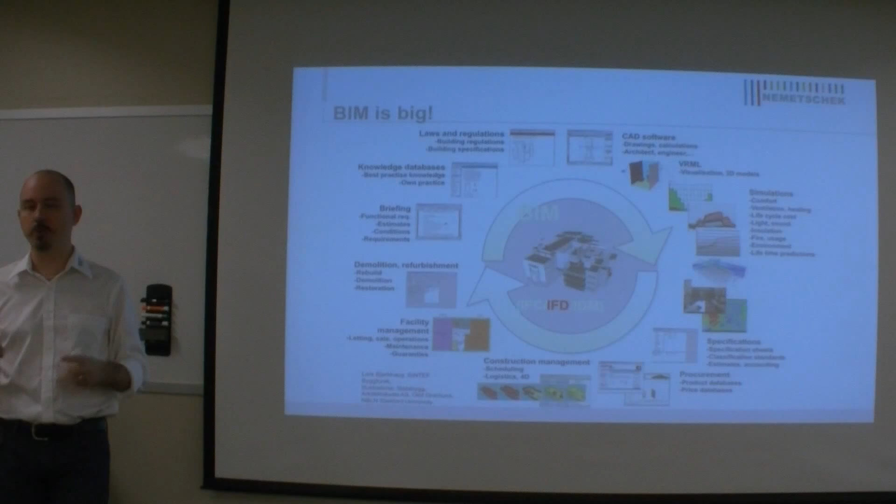So, what does BIM look like from the Nemetschek perspective? I think because of the type of setup, the type of company that Nemetschek AG is, and that all of us operate independently, there's an understanding that BIM is a very large and complex process served by technology. There are so many things that can possibly go on in the BIM process, so many points where high-value processes can occur by many different types of people, that it's impossible really for one person, one company, one technology to do it all. It's too large.

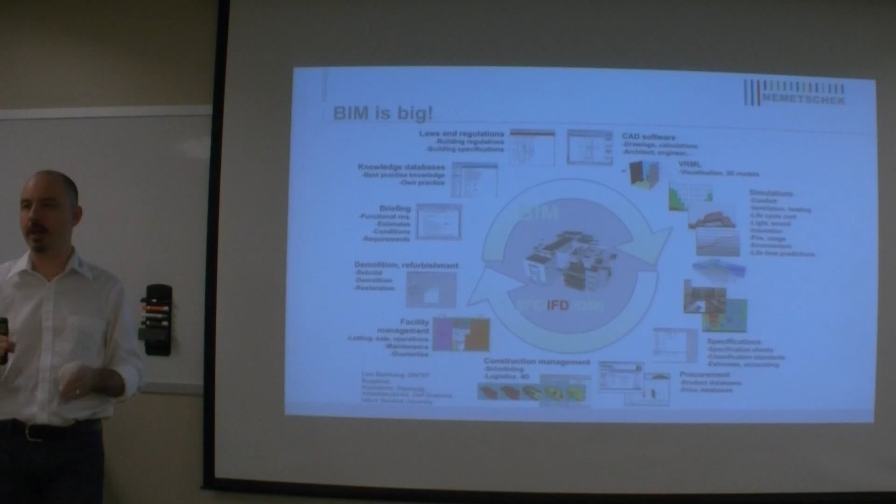So instead, there's an idea of focusing on this idea of trying to create the best-in-class solutions where they can, and then finding the opportunities to collaborate with the rest of the BIM community.

So if we look at the BIM software market, right, we're talking about an industry that's over, I think the latest numbers are 7.4 trillion in the global construction industry, and 5% of that is spent on software. Okay? But within that market, you look at it, as big as Autodesk is, there's still only 1/3 of all the software that is sold globally to get this work done. Okay? So when you look at the diversity involved, how do you move forward?

Right? How do we get BIM to work for everybody without everybody being required to buy the same software or work on the same platform? Everybody has all of these technologies, some very good technologies that do very good things. Some of the technologies work for very specialized reasons and specialized processes, right? And it's very difficult for those things to kind of be a jack of all trades, and end up being a master of none, right?

So wouldn't it be better instead to have these type of communication, these type of collaboration where everybody can work together and still have their best-in-class tools? And we're used to digital interoperability, right? I mean, think of all the different pieces of mobile hardware we have available to us today, whether it's iPhones or Windows phones, which few are still left, Blackberries, Android phones, tablets, desktops, laptops. I mean, we're all able to communicate.

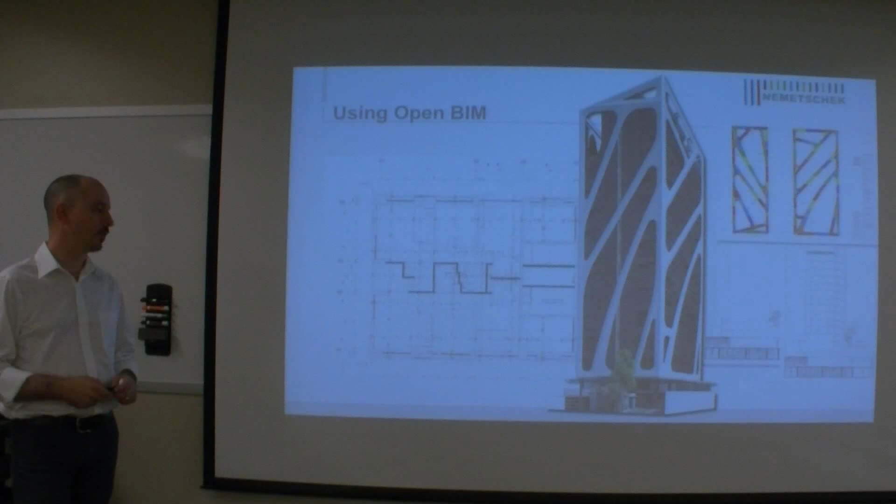So one example is just a project in the Dominican Republic. It's called Ouellette. It's a multi-story residential project, and essentially you start with Vectorworks Architect, doing some general programmatic studies and massing studies, and then moving into using BIM elements.

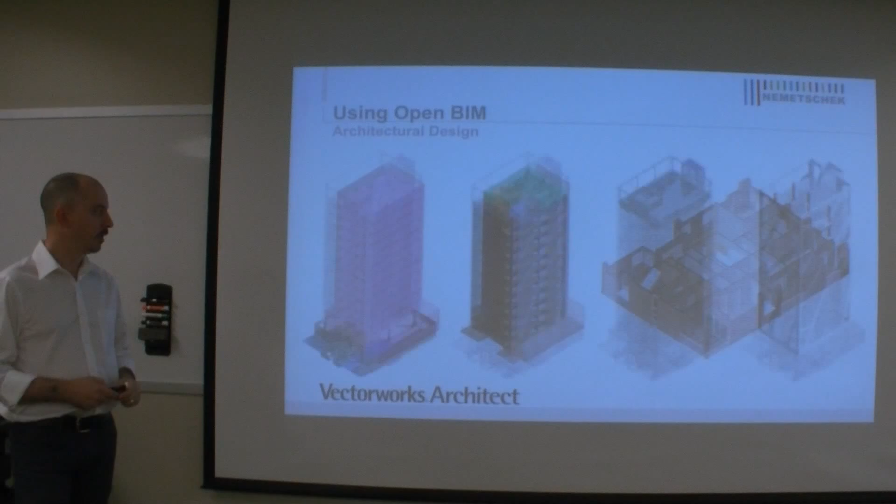And being a large building, it has multiple components. There's the base, which is parking, and then you have some common utilities. Then you have the residential units, penthouse area, and then this exterior skin. And the exterior skin is interesting. It's half decorative, half solar shading skin. So it doesn't do 100% solar shading for all of the units, but it's an interesting design concept.

And so all of this was actually modeled in Vectorworks, and then it was chopped up into pieces, and then it was actually milled pieces, I think the largest ones were 8 feet tall, and sectioned off, and then it was assembled on site. So it's all EIFS, polystyrene kind of stuff with the shiny finish on it. But that's what it looks like.

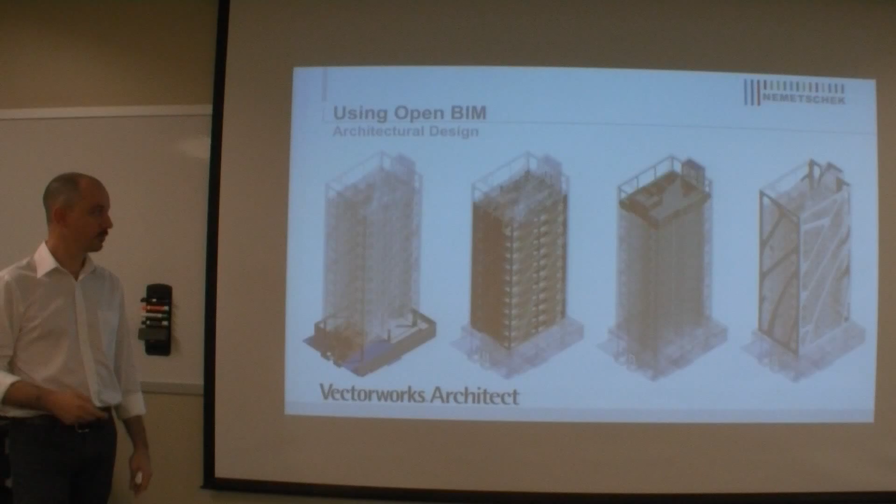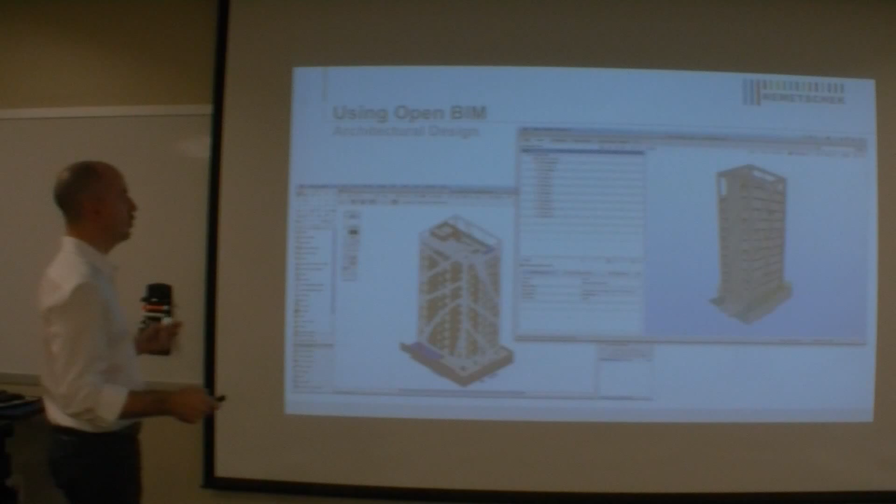So going from a Vectorworks model and exporting it out to IFC, being able to capture essentially all of the geometric information is just one step, but it's a major step, right? I can get out of my native platform and I can push it out so that it can be used by other applications to get their work done. So using IFC as a means to do quality control, quality assurance that the model is correct.

It's very easy when you're sitting there modeling and trying to put this design together to make mistakes, right? The software is smart, but the software is not omnipotent. It doesn't really know everything. It allows you to make mistakes. And the great thing about tools like Solibri or even Navisworks is it'll find the mistakes for you, right? It understands the rules and relationships between objects.

So you're able to send this model out and you can see, hey, these walls were too tall. They intersect with these beams. Or that I don't have certain clearances in front of certain doors in my unit. So I can use this as a quality check even for my use as an architect in Vectorworks, right? And do the same thing.

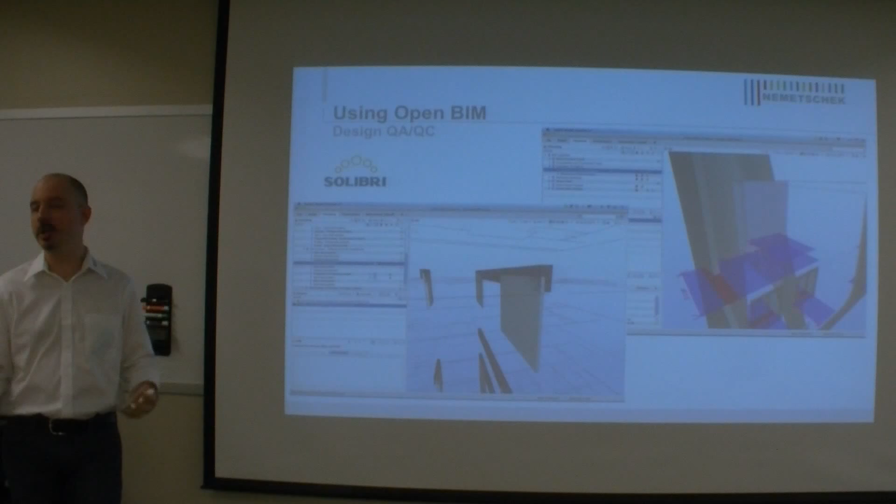Solibri likes to talk about this in terms of using Revit too. How do I know I've got a good model, right? I have to do a quality check. How do I do that quality or sanity check?

So then taking that model once it's finished and pushing it out for building energy performance, as I talked about before, is using IES. IES is an interesting company. They sell software, but they're also a consultancy, right? So they have a number of scientists and environmental engineering experts that not only are responsible for creating the software, but also for training people to use it. And when it's too big or too complex of a project for an engineer or an architect to handle, they'll do the work themselves, right? And they're based in Glasgow, Scotland.

So we do a sanity check and we say, okay, what does IES need? Well, it wants shading devices and spaces. That's it. That's how they do their simulation. Because all of the thermal information from walls, all of the thermal characteristics of a room, the requirements, it's all encapsulated in the space objects. It doesn't need all of the walls, all the junctions, all the doors and windows. What it needs are the spaces and what we call space boundaries, right? The hole that represents where the window or the door is. That's all it cares about, these planes.

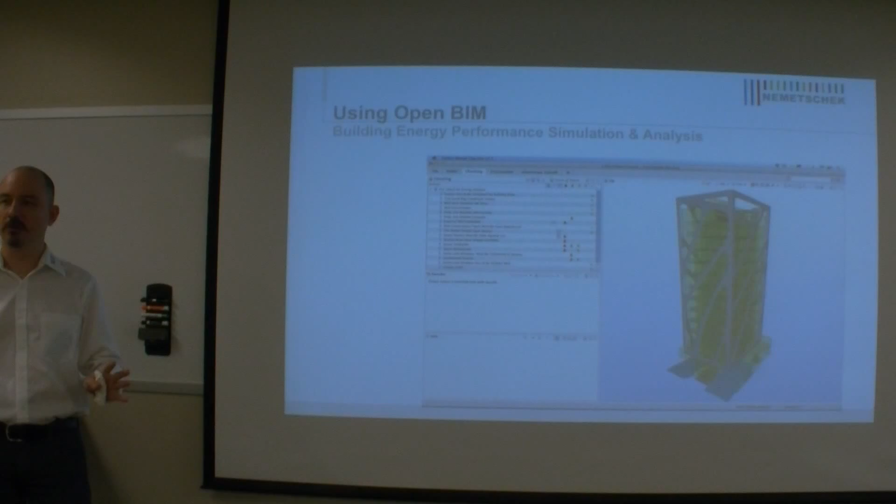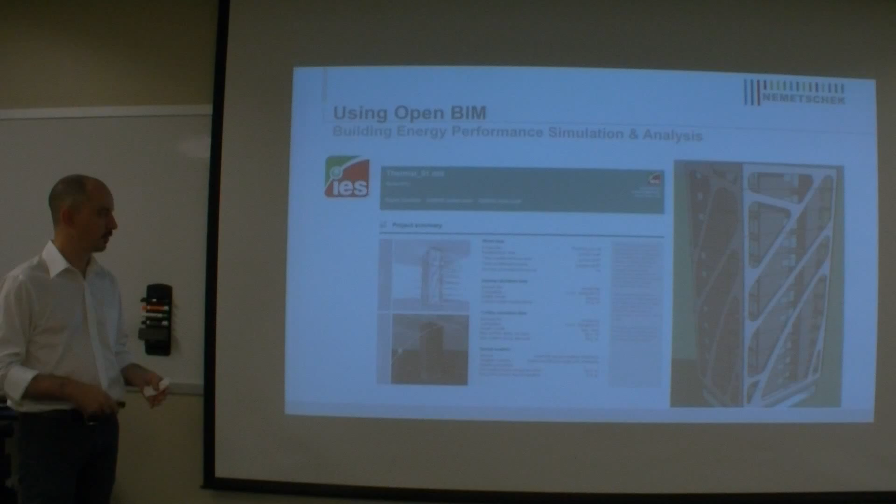You can have solar studies and what's happening on all the surfaces, subdivided in terms of heating throughout the day, different points of time, in different times of the year. And then producing the psychrometric charts: what's happening in terms of the comfort level of the spaces inside the building based on the climatic data for this particular location, right?

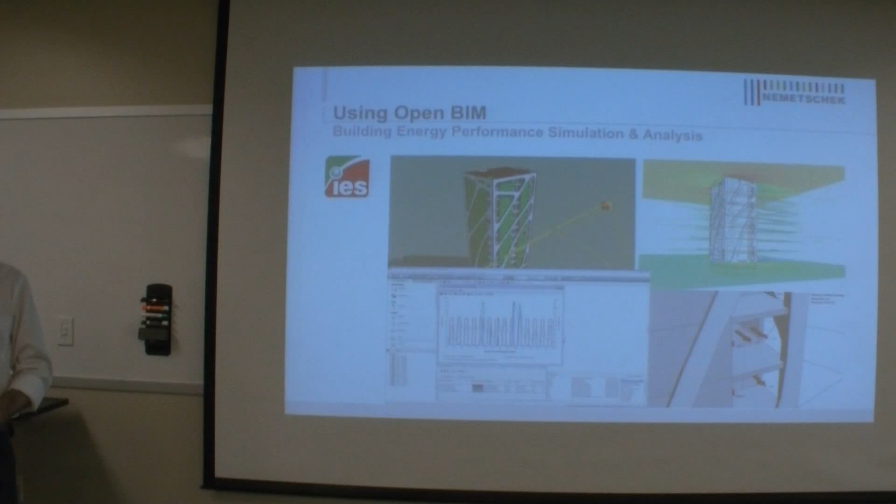And even looking here is a detail of what effect the winds and the orientation of the building have on the balconies. Is there a positive pressure? Is there a negative pressure going on there? Are people going to basically get sucked off their balconies every time they step out there? So it can provide that type of information, and that's great.

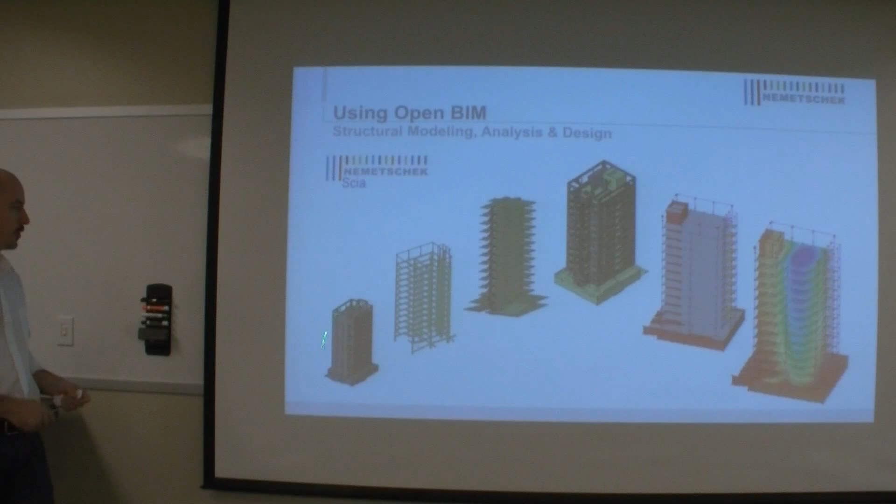Taking that same model and moving it over to Nemetschek SCIA. Nemetschek SCIA is basically sucking in that IFC model and then going through a transformation process where it says, okay, I have this IFC model, I understand here's a beam, I understand here's a slab, but I have to turn that physical model into an analytical model, right? Because the analytical elements are different than the physical elements.

When I have a slab, it has an analytical plane. What is my plane? What is my diaphragm? And then for a beam, is it the center line of the beam? Is it the edge of the beam? Well, the structural engineer knows that, not the architect. And the structural engineering software is intelligent enough to help the structural engineer make those determinations and clean up all those intersections.

Because as an architect, we think a lot about the physical details of the way a building goes together. But what the structural engineer needs to do in the analysis and design is figure out, well, where are the forces meeting? Where are they actually coming together? And how does that actually work?

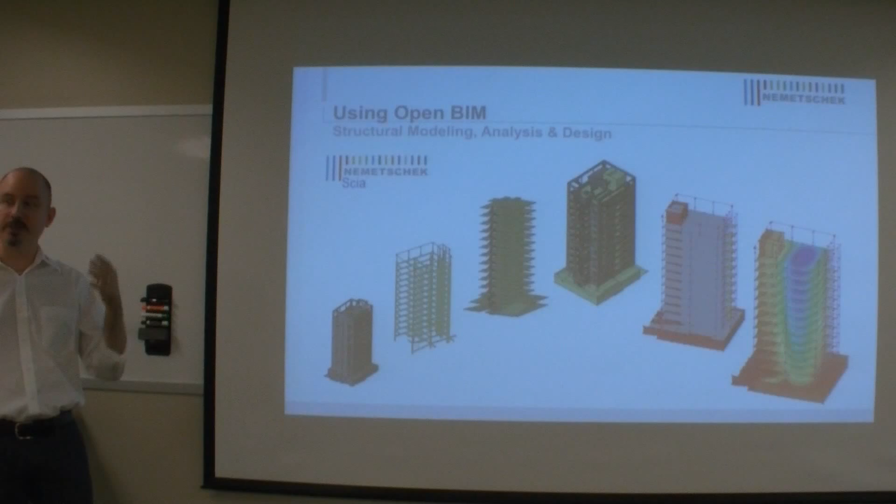And then from SCIA, you can even take it over to Tekla, where it says, okay, well, I know in principle how all those things are happening, but then when it comes time to detailing it, how do I do that? And an application like Tekla is very useful because then you can actually take those pieces and put them together all the way down to the bolts and the rivets and the welds.

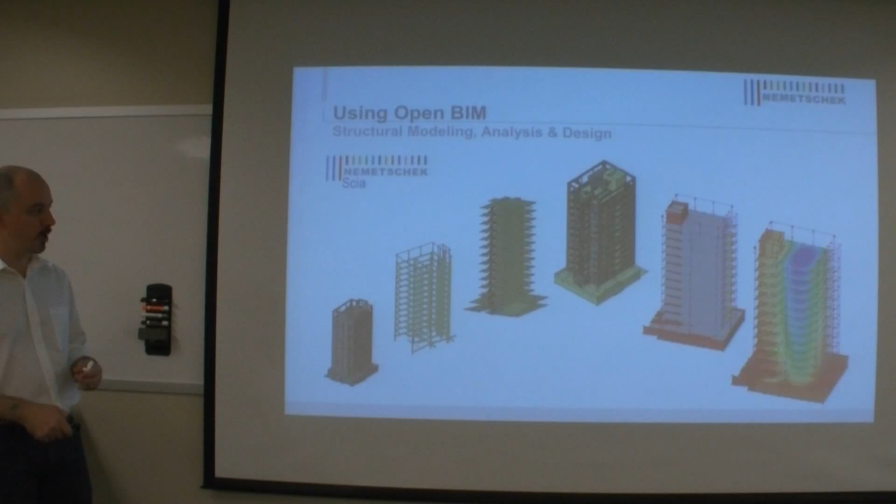So here you see the basic frame, concrete frame, you see the plate elements, how everything goes together, and they start doing structural analyses on the analysis model, right? The abstract model, where you see where the stresses are on the plates and in the walls, these nodes. Then you take that information and you actually are able to overlay it simultaneously with the physical structures.

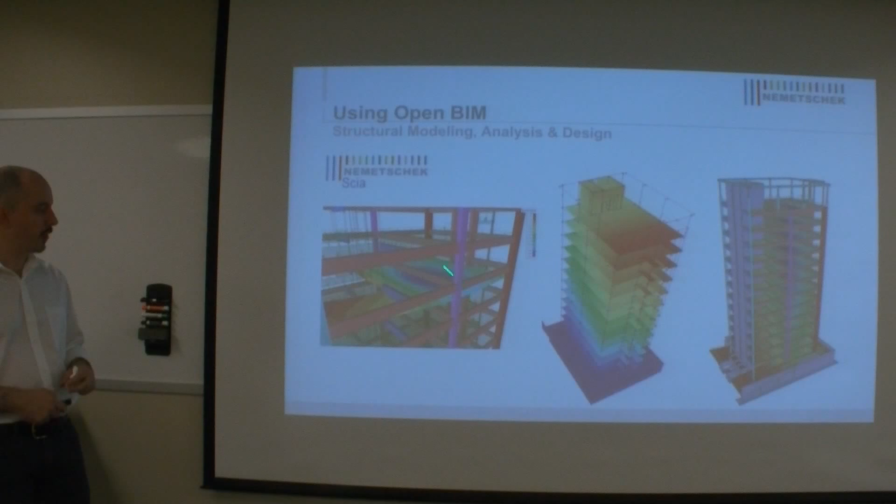So you can then begin to see what happens to the deflection of the slab within the skeletal frame, right? What's happening with the pressures on that? And where is more structural reinforcement going to be needed? Or is a thicker slab needed? Or is more structural framing going to be needed?

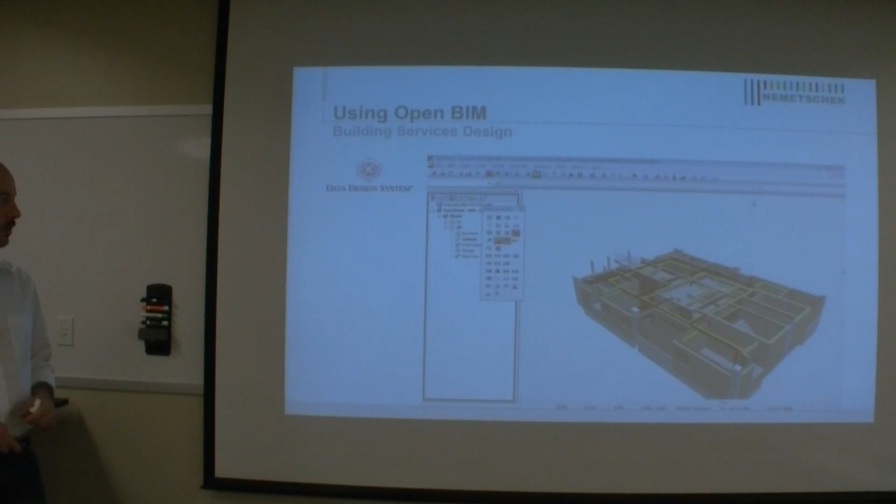At the same time, mechanical electrical engineers can be working. And in this case, we were working with engineers from DDS-CAD. And they were able to take that same IFC model, that same base model that we gave to the IES guys, that we gave to the SCIA guys, and they were able to suck it in and start laying out the HVAC and plumbing work for each of the stories, for each of the units. Right? And this is just a snapshot of their tool. And then they're able to export that out as IFC models.

And we're able to combine all those models in places like Solibri, right? Where we can take the architectural model and the structural model, and then the HVAC and the plumbing, and put it all together and see how it works. Take sections of the building, take slices, drag the little cutting plane through there and begin to see what's happening.

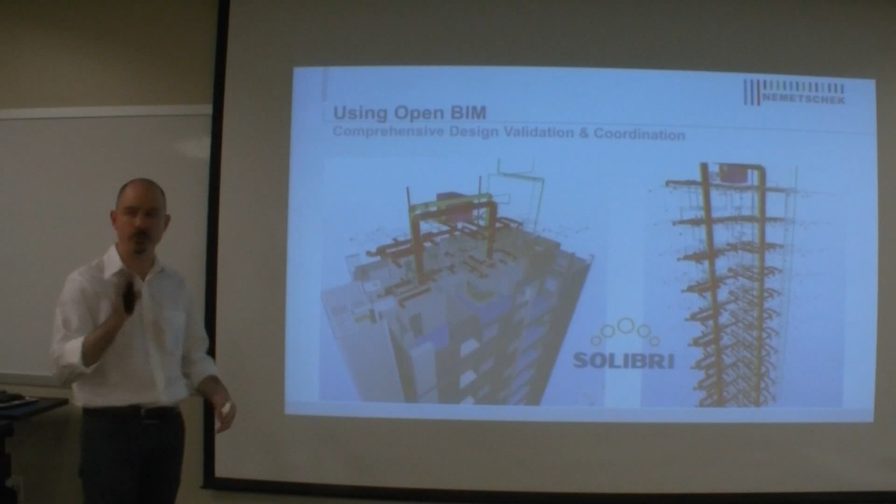And then run the rule checking. Show me my clashes, right? Show me my clashes between architectural and structural, show me my clashes between structural and MEP, show me these and make a list of them.

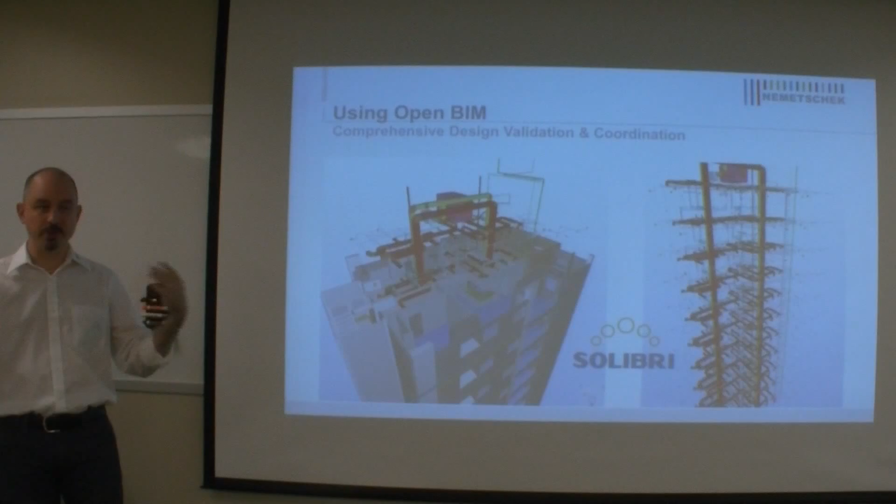And even then taking all of that information back and sucking it back into Vectorworks, right? Because what's important for the architect is not only giving the information out for all the design partners to use and react, but then getting all of those models back so that the architect can make adjustments.

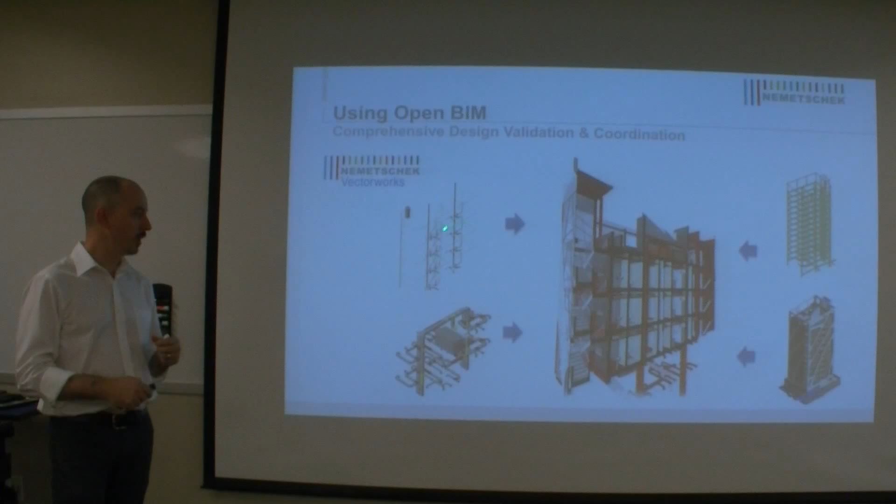So essentially, what the structural engineer was able to create and what the MEP engineer was able to create is then brought back via IFC into Vectorworks and overlaid with the Vectorworks internal data model, right? And all displayed in the same place. Then I can begin to see where I need to make those adjustments.

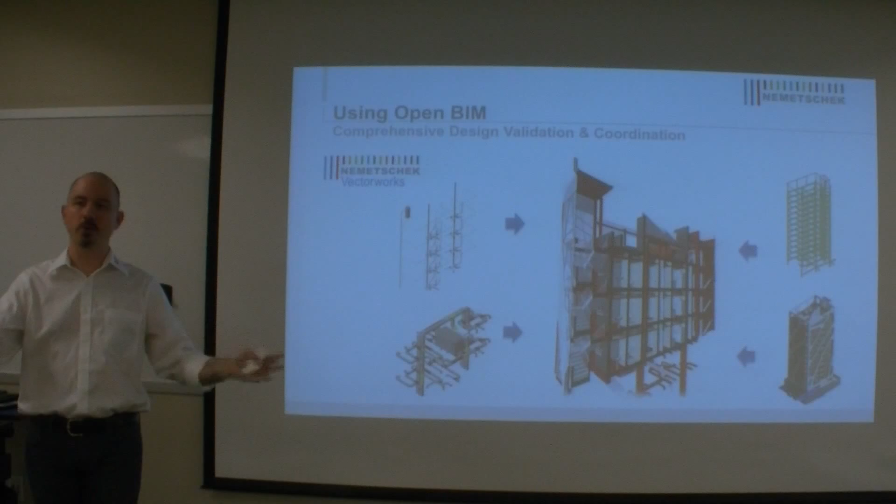Now, ideally, I'm still going to produce those reports, those clash detections, where the problems are in Solibri, and then I'll distribute those reports out to everybody and say, hey, we have to make our changes, right? So here's where we make them, here are the highlights, and now I can go back as the architect and I can make those changes. But then I can also begin to pull together these types of presentations and do this type of coordination even inside of Vectorworks.

And then using a tool like Solibri, as I said before, probably the one tool I said everybody has to have in their BIM toolbox. Why? An example, spatial program validation. So this is what the GSA uses as a part of their mission as the world's largest landlord, right?

Hundreds of millions of square feet of office space they have to manage. 100 million square feet come on board every 2 years. That's a lot of space. So what they're responsible for is, what are the spaces, how big are they, who's in them, and how much are they paying for them? And then when somebody moves, they have to track all that.

That's all been done by hand for decades. What they do now is they use Solibri as a tool in order to aggregate all the information. All they really care about are the spaces.

The spaces are tagged with information. Within the BIM model, it knows what building it's in, its site, what story it's on, its room name, but they're also able to add information like which department it belongs to, what's the sub-department within that overall department. It says DOD, but where within the DOD? And then who's responsible for it, and who's the person that's in it, and how much space is in there and what's their lease rate?

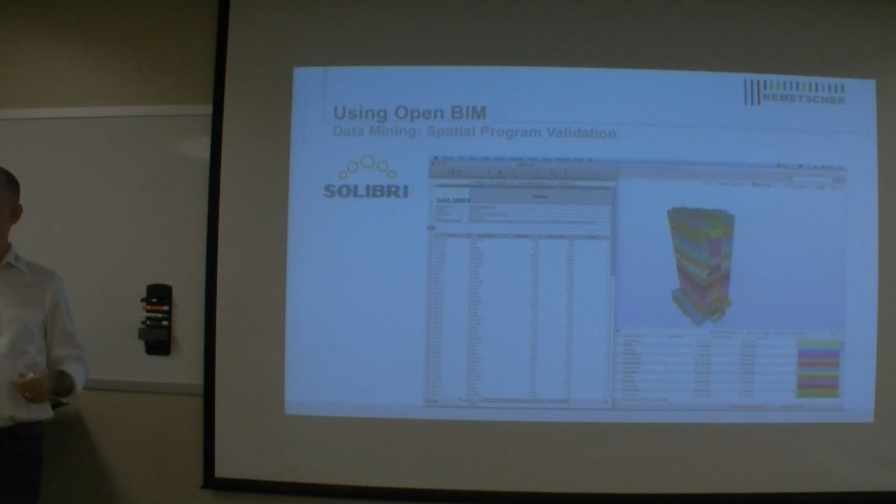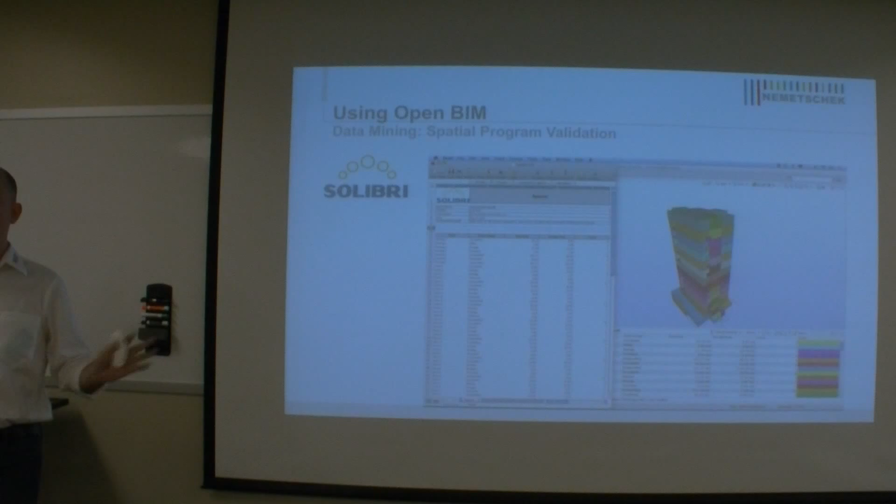Because ultimately, every agency needs to know that as part of the budgeting process. What the GSA does is create these lists, and the original lists are all in Excel, and those lists are then compared within Solibri against what the model says. If they don't match up on a design, they can say, hey, you were told that this department needed 200 square feet per office, and 50 of the offices are under 150 square feet. We found that out by just looking at the model. So what are you going to do about that? Or if it's over, or how close is it? Then they're able to track all of that information.

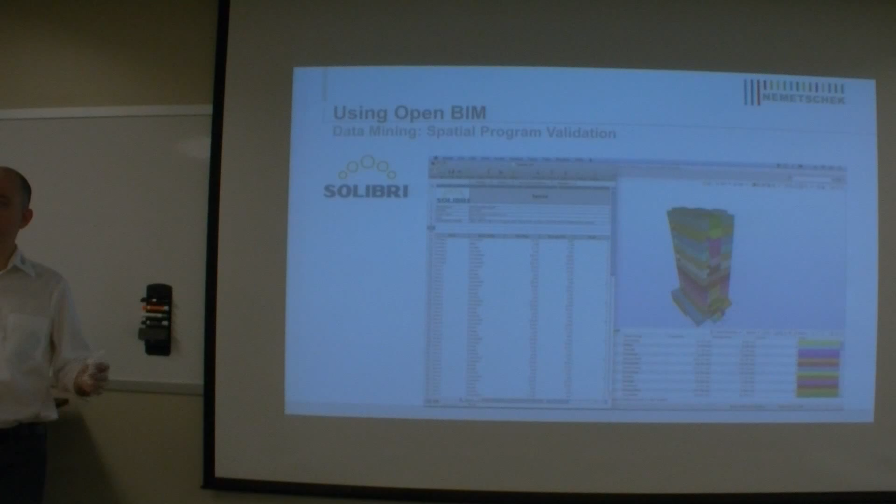Quantity takeoff. Within BIM, I can start adding information to physical objects - the analogies to physical objects. What kind of wall is it? Is it an interior wall or an exterior wall? What kind of interior wall? Is it a firewall? Is it a roof slab? Is it an intermediate floor slab?

I can add all of that category information based on Uniformat, based on Masterformat, based on any type of classification - Omniclass, however you want to put it together. And I can begin doing information takeoff within Solibri that says, show me what I got, group it together, color code it for me so I can see what's going on. That's where really the power of BIM is.

The modeling can only take you so far. Putting the information in can only take you so far. But if you can't do something with it after it's all in there, then what good is it really? I want to take it to the next level. That's where the value is.

Not just for the construction process, but this becomes valuable for the owner too, because now you have facility management software - CMM and even CMMS systems - that are able to suck up IFC models and begin to develop their information through things like COBie or through IFC directly.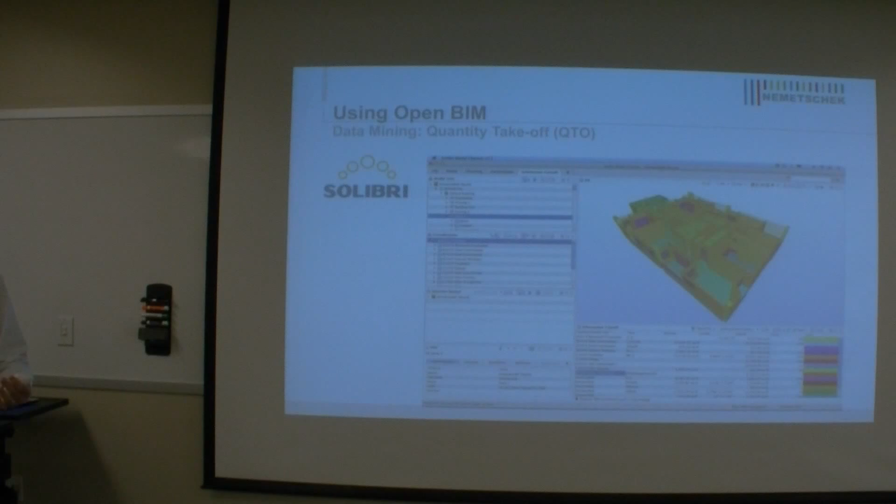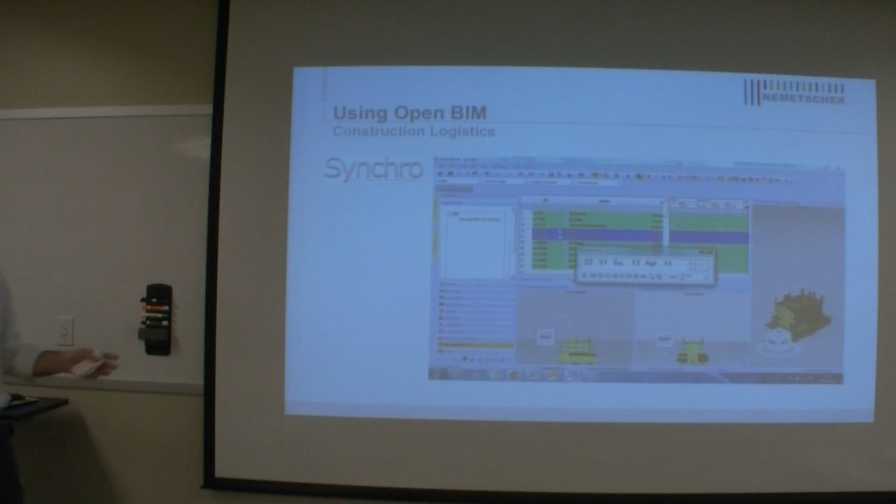An example is Synchro, this construction management, project management software. We've been working with Synchro for two years now, and what they do is take this IFC model and assign time attributes to all the pieces - on a floor basis or on an element basis. One of the first experiments they did with this building was just floor by floor, but we all know you wouldn't build a building truly floor by floor.

This is a concrete cast-in-place structure, so the structure goes up floor by floor and then things get filled in behind it. But the interesting part was all they had to do was identify the elements, and then they could add that information in.

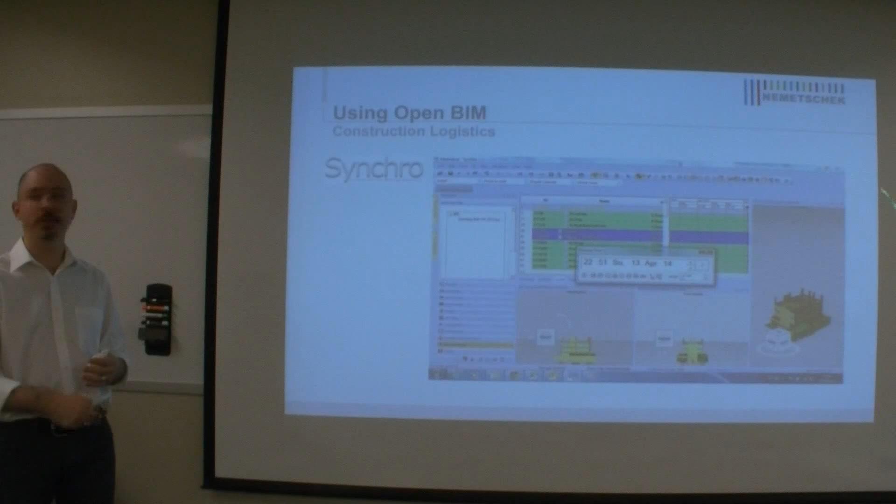They didn't have to go back to the architect and say, hey, you need to fill this out before you give it to me. No - you gave us the physical model, you gave us the base data that's already there. We know what everything is named, we know what everything is. Now we can add our data to it, manipulate it, use it, move forward in the process, and do a timeline of how long it would take to build this building, all the pieces, and go back and forth.

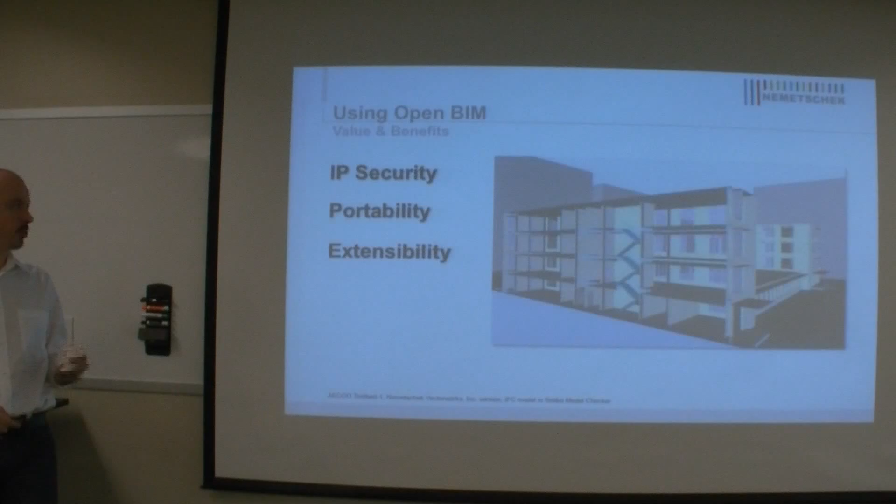This is the thing that everybody's looking for. And the reason that Nemetschek...